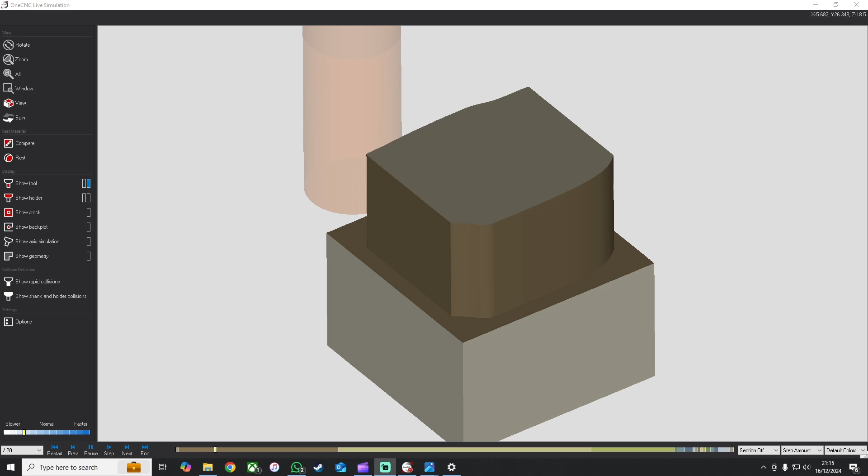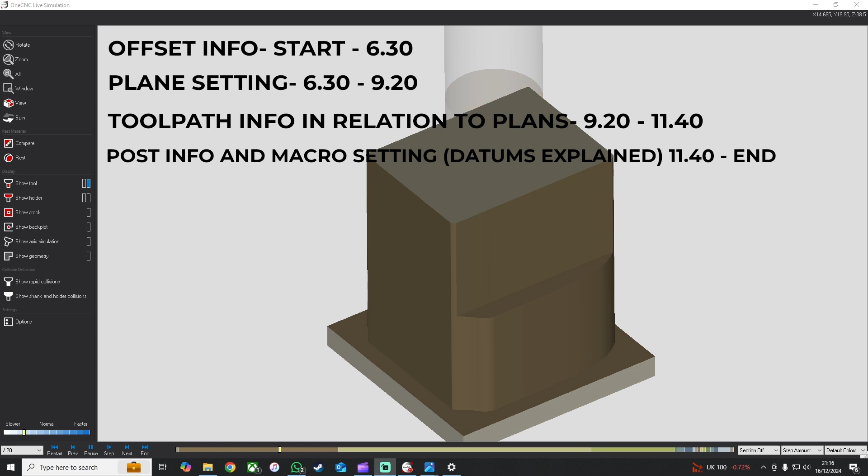So at the beginning of this, we're going to be talking about offset, all the offset details, and then we're going to be talking about plane setting, and then we're going to be talking about the toolpath info regarding how you set up your tool into your planes, and everything else regarding that. And then the rest of the video is going to be about manipulating your post, setting your post up, how you write macros, what all the macros mean, where the data comes from, etc.

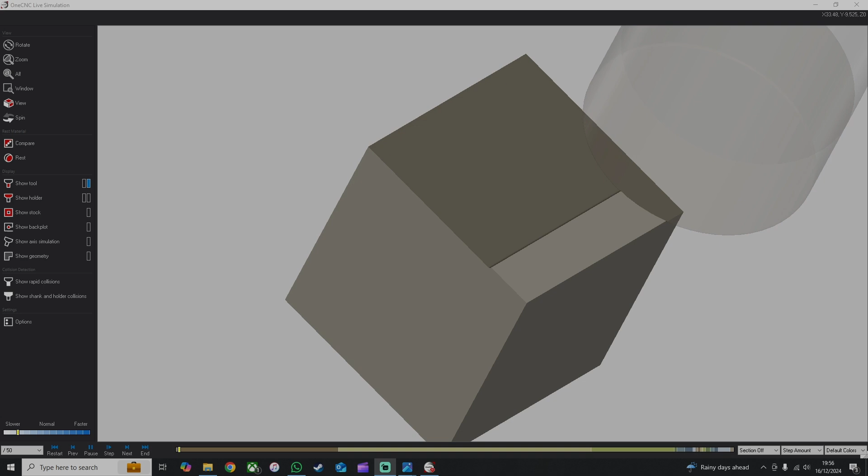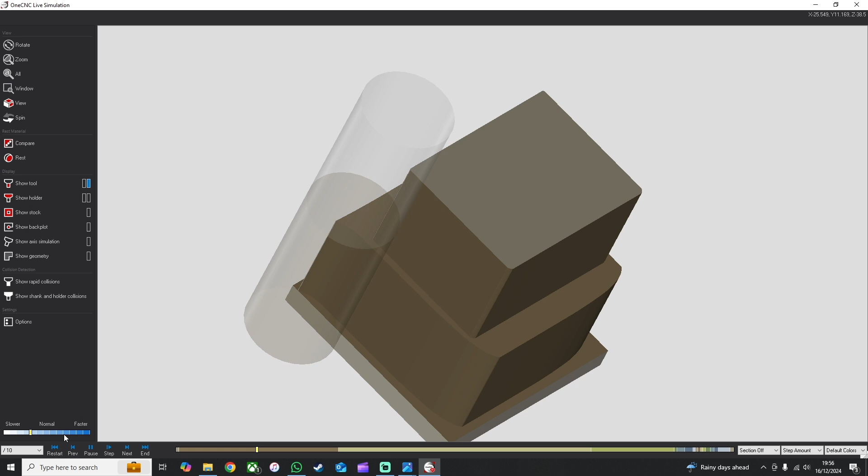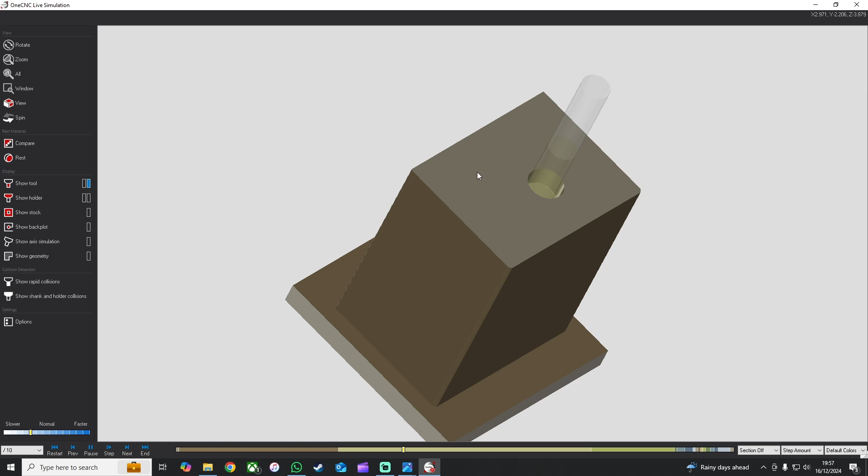But what I'm trying to do is try and give some good advice on how to use OneCNC to get it to do whatever you want it to do. If you're struggling with certain things, then let me know, and I'll create a video on how you can either do things the way I do them, or teach you the ways you can manipulate them to suit your needs. I don't claim to know everything there is about OneCNC. I've just used it for a long time, and I like it. I think it's a good bit of software.

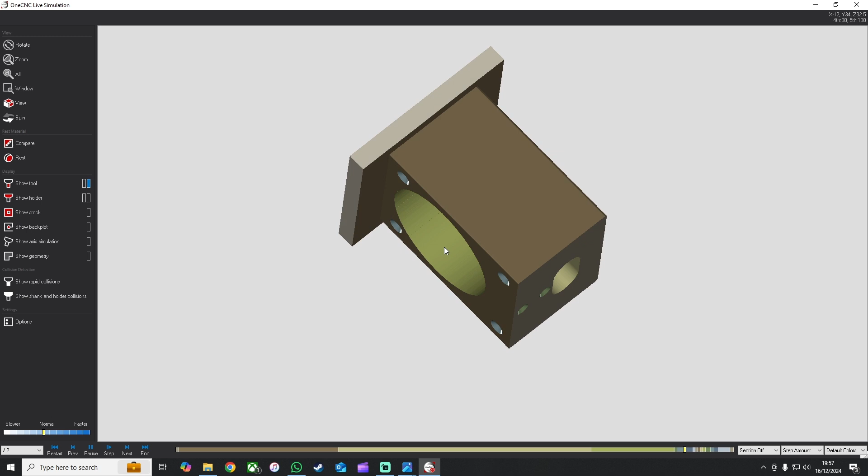I mean, for 5-axis and stuff, don't get me wrong, there's better bits of software out there, like your Fusion and your Hypermill, your Mastercams. There's loads, but if you purchase this and you've got 5-axis machines, and you don't want to pay for another seat on another CAD package, then you can use it for doing some 5-axis machines. I wouldn't ever do full 5-axis style with it. I think OneCNC tip of the day will show you some full 5-axis toolpaths.

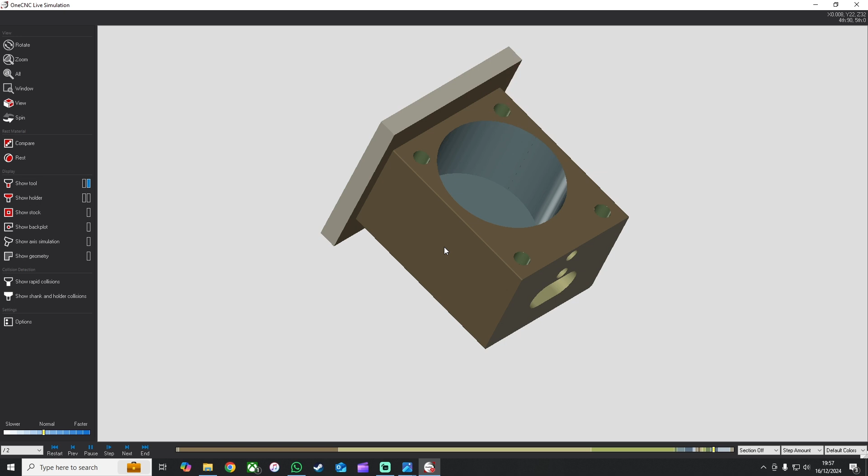I'm not going to go showing you that, because that's not what I've used, and I didn't really get on with the 5-axis side of things on OneCNC, just being honest. 3-axis, brilliant. I'd say it's one of the best 3-axis softwares you'll get, just because of the logic and the toolpaths that are in this software. I think they're very, very powerful.

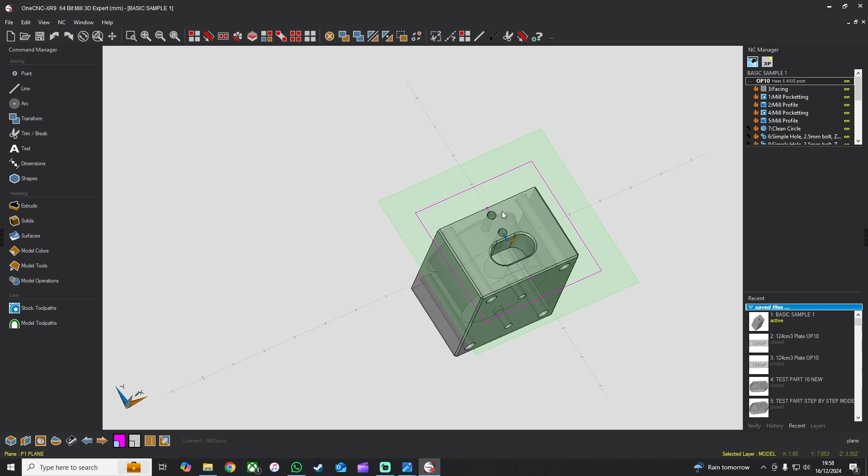Underrated, in all fairness. People go Fusion, Mastercam, Hypermill, whatever, especially Hypermill. I hear that all the time. And they are fantastic, don't get me wrong. I've used Fusion and Hypermill, but I've also used this, and this is the one I'm super confident on. I like this, I keep going back to it. I just like the toolpaths. So without spending too much time waffling on, let's just show you what I'm going on about.

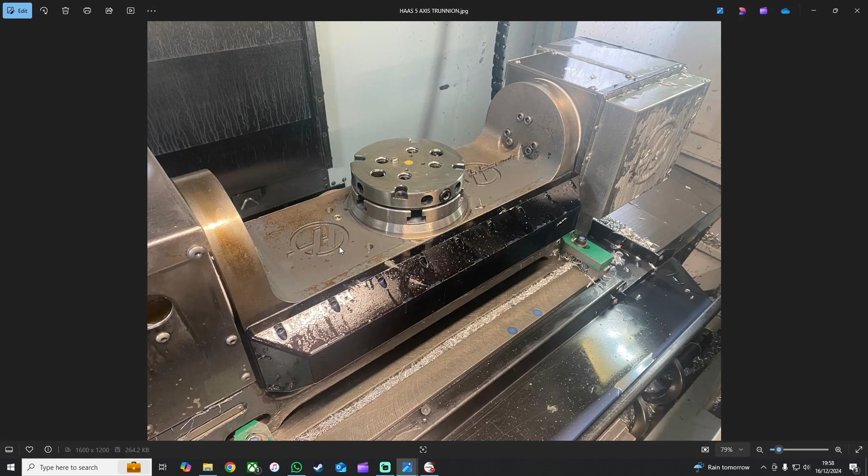So this is your 5-axis Haas trunnion that some of you might be familiar with. You can buy these for about 30 grand brand new, I think. Don't quote me on it, it's not like I've purchased it. But this bolts directly onto the bed of a VF2, as you can see. You could bolt these onto whatever you want, as long as they've got 4th and 5-axis capability around the back.

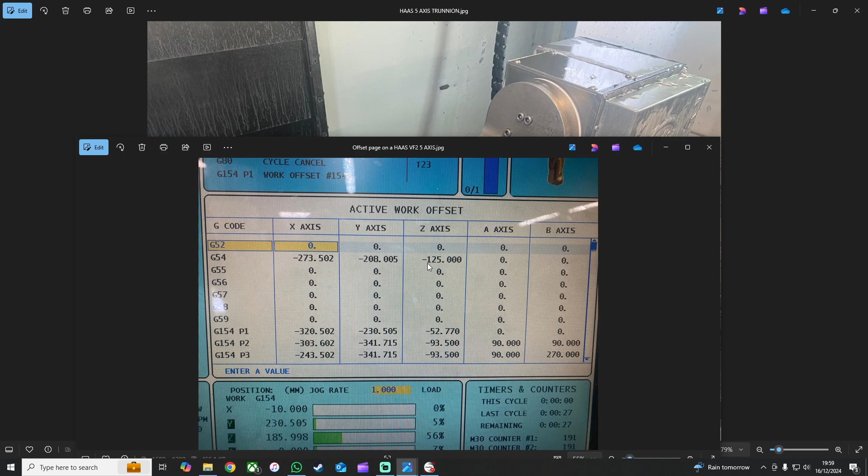So to talk on this a little bit more, I'll just get rid of that photo and I'll show you the offset page, what the offset page looks like when I'm going to show you how to set this up on OneCNC. The center of this trunnion, this orangey point here, will be the center of, well, it's not technically the center of rotation, but that's the center of the platter. This is your platter here. These are where your Lang vices and stuff bolt. I just need to add this in.

I'm going to pause the video and add this bit in, because I forgot to mention it in this video, so I'm going to mention it now. All the tools on this machine are set at 125mm above the center of rotation. That's where that Z figure comes from, okay?

All the tools are set off a post that you can't see in this photo, to the left hand side of that trunnion, which is actually 115mm, but then there's a 10mm setting block that gets used, so it's 125mm from the center of rotation. So that Z-axis shift is to bring all of them tools to be basically set from the same 0 point of rotation, if that makes sense.

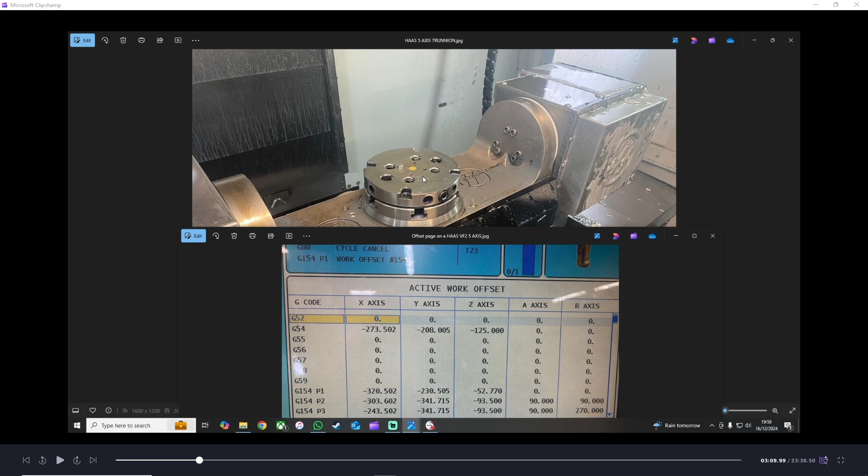Whatever work holding you're using will bolt to here. And then if you look over here, imagine there's a little center point there, and this rotates around that point. You'd think it would be flush with this face here, or even flush with this face where this platter bolts to. It isn't quite. I can't quite remember, it's been a long time since I've actually clocked one of these in. I think it's about 5mm higher than that face there.

It's irrelevant. You just need to find the center of your rotation, and that is where you'll set all your tools from. That's where your datums come from. So on this particular machine, we set our tools 125mm higher than our center of rotation, hence why we have this figure in here. And don't worry, it's not like your Z0s are going to be down here, and if you make a mistake you're going to plunge into it. I'll show you what you do. You use macros to offset this datum to give you these datums down here.

So you've got your G154 P1, 2, 3, 4, 5, right up to whatever your machine's capable of. I think some of the classic controls go up to 200, and the latest gen controls, I think they go up to thousands or something like that. Don't quote me on it. It's not like I'm going to study the offset page. I just know how to get by with it.

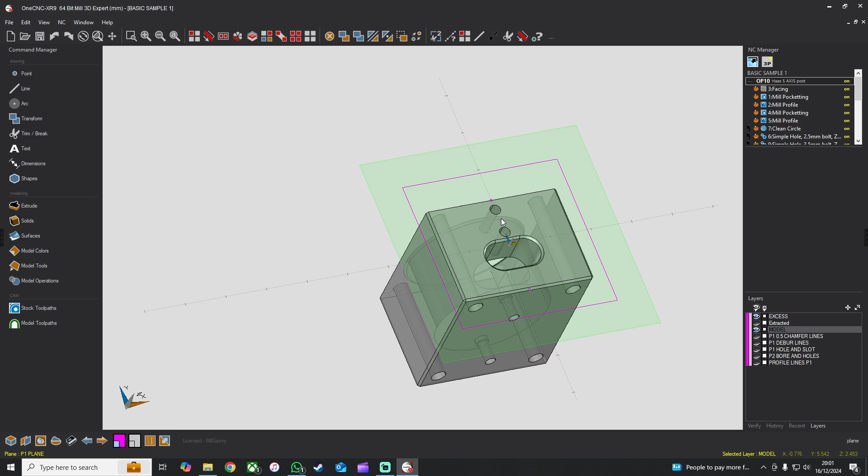So anyway, let's jump into this. When you've got your model like this, when I first set it up, I'm going to orientate it as if I'm looking at it from the spindle's point of view. So you can imagine this part here is in a vise. I've just shut that image down. Let me just reopen that image of the trunnion. Right, my part's in a vise here. Part's sitting about here, and I'm looking from the spindle down on top of it, and that's the view I'm going to see from the spindle. So that would be what I call P1.

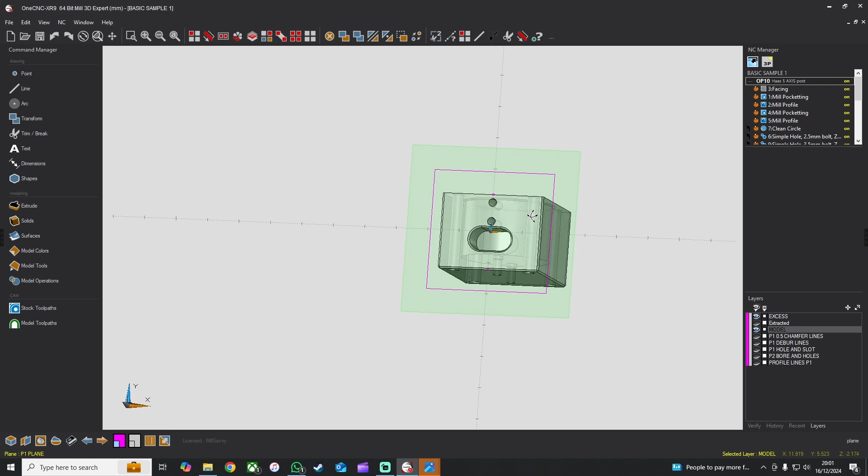And now if I want to rotate it, which I'll show you how to do with the macros when I post this program, I would call that face P2 because it's at the back, and directly opposite, I'd call that P3. I'd call the face to the left of my P1, P4, and the opposite one I'd call P5. You call them whatever you bloody want, it doesn't matter. But you just need to know how you work and work the same every time.

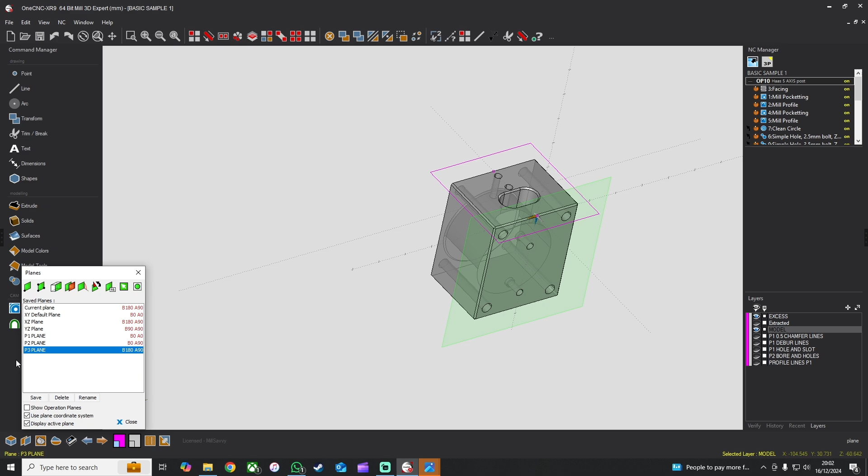So to set these planes up, you can see here I've labelled them like this, and you can see the plane changing, look. And it's very important that you have these highlighted when you're applying your toolpath. So there's my P1, there's my P2. To set this P2 up, I'll just redo it to show you. Before I jump in, I create points at where I want to datum that plane from my P1 top face. Once you've got your point where you want it, it's very easy, because what I do is I extract the profile lines and then put a point in the center of it.

So it's quite simple. Don't try and do anything complicated, there's no point. Create a plane from the surface, select that, move your plane to a point, select that point. You can see how my plane is not orientated how I want it. A lot of the time, all you've got to do in this situation is rotate it around the Z-axis tilt by 180. And you can see there, that's set up how I want it to be set up.

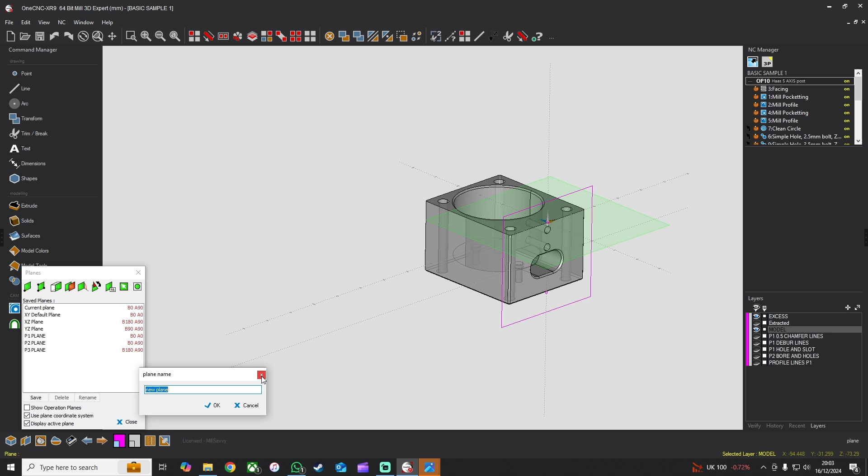Now before I do anything else, you want to click save. I've already created a plane, P2 plane, so I'm not going to click save. But if you're doing this, save it, name it what you want. If you click save, look, it comes up and gives you a choice. Name it P2 plane, G154 P2, whatever, up to you. Call it Steve if you want.

Anyway, you can see there, my x-axis goes sort of to the right, y-axis is going towards the back, and the z-axis is going up. That's how you want it to be set up. That's how your P1 and everything else is going to be set up. So you want all these planes to be set up with the right orientation.

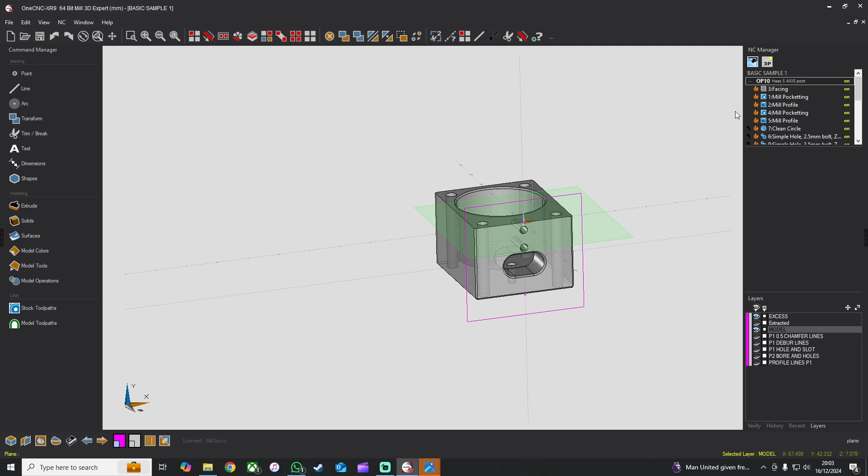So now you know how to set up your planes, and obviously you know how to apply a toolpath to a part as you're working your way around it. So watch this, I'll flick through it so I can show you what I mean. Let's just grab my P1 plane. For instance, that's P1, P1, P1, and as it's going on, I'm doing everything I can, and then you can see that it jumps to P2, but you can also see this plane moves.

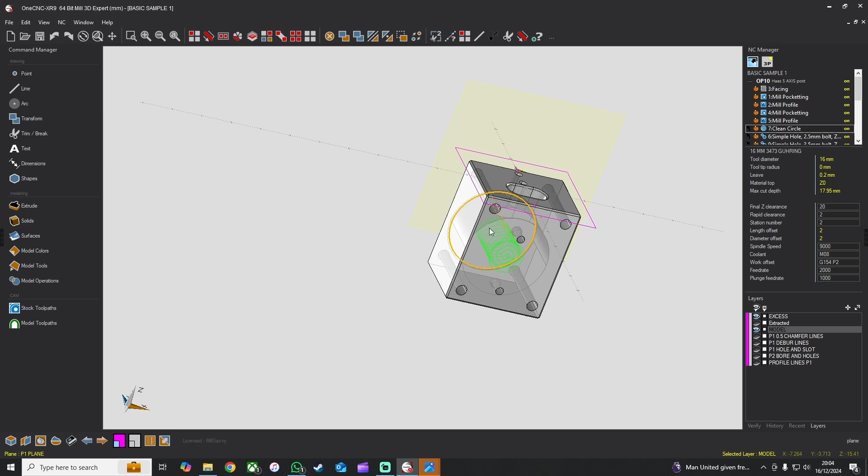That's because when I'm applying this toolpath, I'm making sure that I've got this selected. So every time I apply a toolpath, I select that plane. It's a little bit more work compared to what you'd have on something like Fusion, but remember, I'm using 3-axis reposition. This isn't full 5-axis software at this point, if you know what I mean.

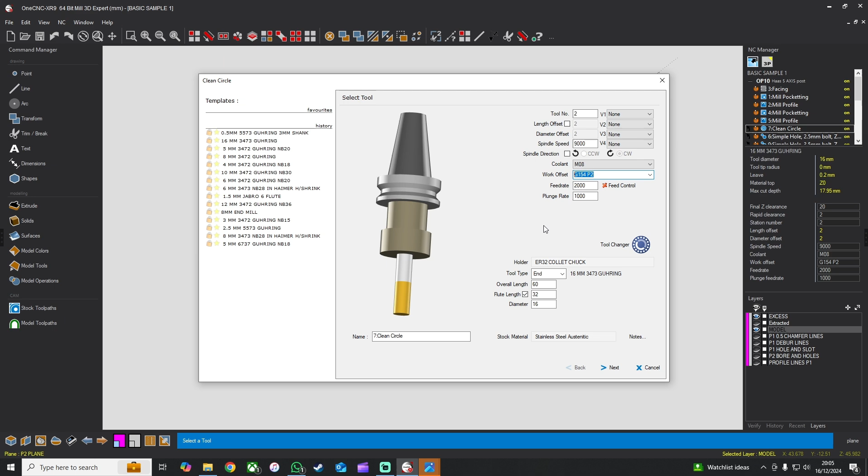So if I just go edit to show you how I'm doing it, that's how I would program with my work offset. If I'm using P2, I'm going to program it with P2. It's very easy to get this wrong, because this will default to whatever you used on whatever toolpath you're selecting. So if I'm using profile, the last time I used profile, it might have G54 in there. I don't want it to be G54, I want it to be my 5-axis macro datum, which is G154 P2. So I need to remember to add that in. You can get this very wrong, so you need to be careful.

I'm not going to try and say this is it, I'm showing you how you can manipulate it to do 5-axis on a 3-axis reposition option here. So don't get me wrong, there might be better ways of doing it, but this is how I figured out how to get it to work for me.

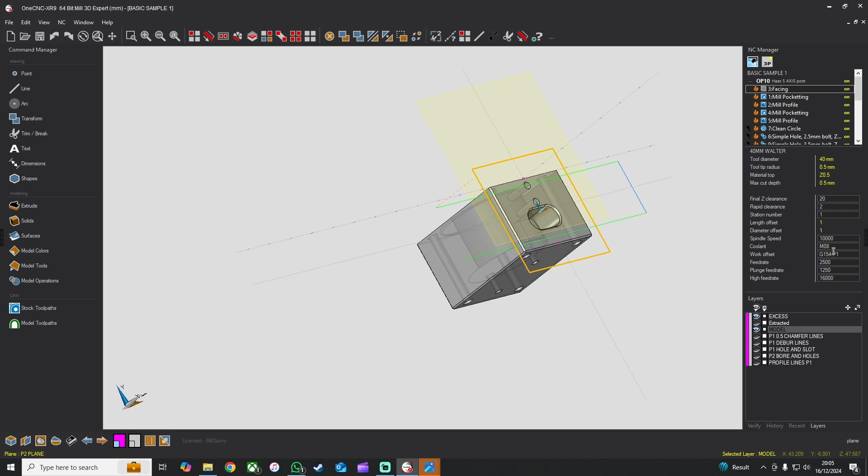So once I've done all this, I'm not going to post it anytime soon. I'm going to do a lot of manual checking here. As I'm going down my toolpath, I click on these and I check here, don't want to alter it, I check here, yeah, that's P1, that's P1, P1, and I work my way all the way down this list, checking everything I've clicked and typed is correct.

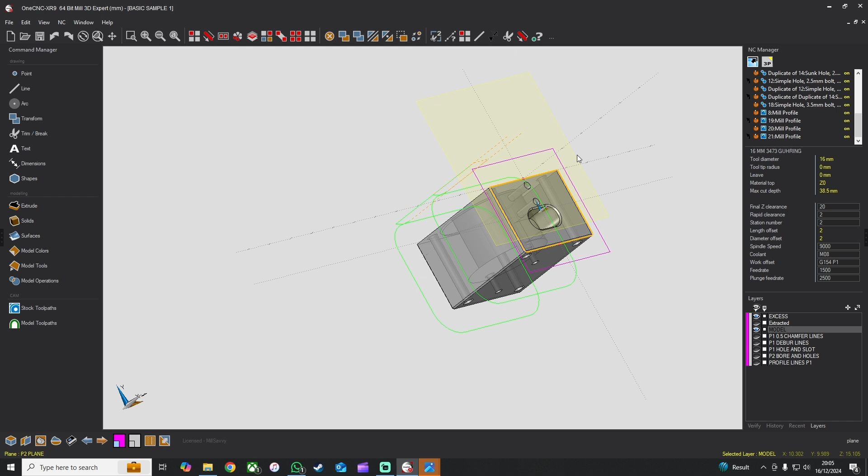The last thing I want to do is post a 5-axis program out wrong. It rotates to the wrong face with the wrong macro settings, and I put a tool through the job, or the vice, or smash the machine, or damage something. That's the last thing you want to go doing.

So I'll show you what the post looks like. This is my sample 5-axis post. I haven't quite perfected this post for this video. I need to go do it, but it's close enough for me to show you an example.

Just quickly save over this. You can obviously see that I did a video and then thought, nah, that's a bit rubbish, I'll redo this quickly. I think I can do it in less than 15 minutes. So

So I don't want to focus too much on what's going on at the top here. I'll be repeating myself from the previous videos. The only thing I will mention is, look, it says warning, duplicate tool stations, duplicate station used, yeah? And all that is where I've used the same tool to chamfer and spot. That's all it is. And I've just had them set up as two different things in my library, because this one, I've cheated it to think it's a 3mm tool, look, 1mm offset. I'll literally, before I post it, I'll just delete it.

Right, so this is the bit that will take a bit of time to explain. This is your macro. This takes all its information from, let me show you. Hold on, not that. Let me pull up the image. It takes all its information from these lines here, G54, X, Y, and Z, A, and B. Okay, so let me pull up the picture of the trunnion again.

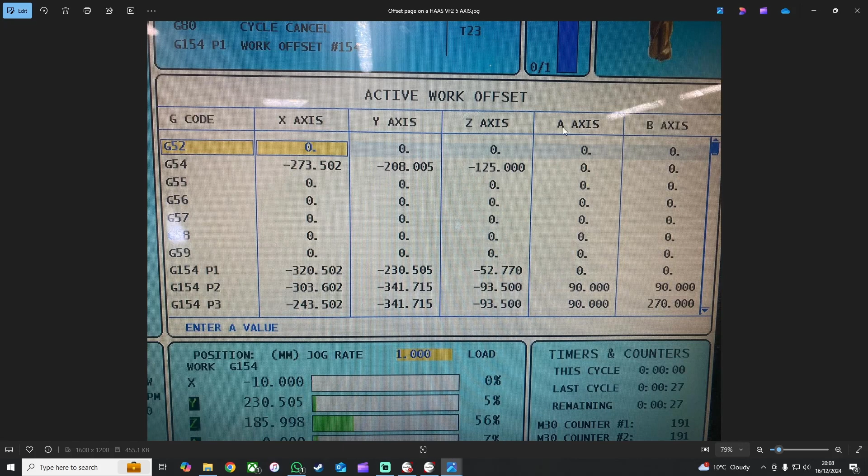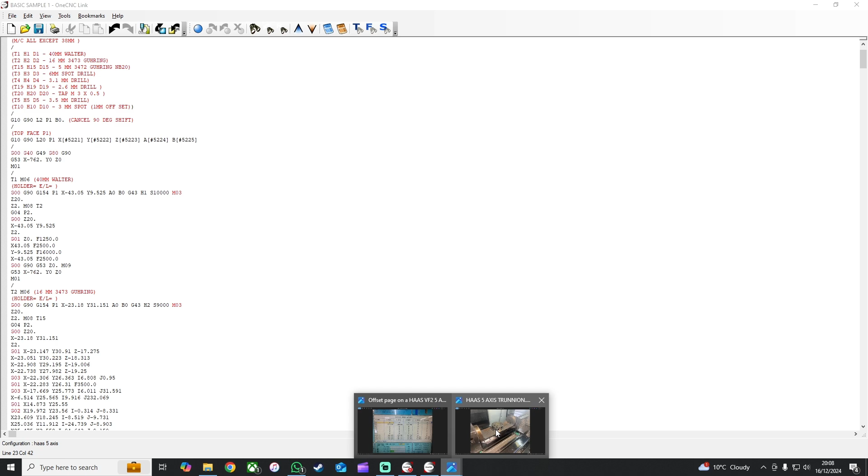So my P1, for instance, let me pull that back up, will be 150mm higher than this point here. So don't try and worry too much about what this number is. It's kind of irrelevant once it's set, because you just set everything from the center of rotation, and that's all you really need to know. All I need to do is, if I pull up that picture one more time, I should have explained it just then. My job, say this here is 25mm above center of rotation, because center of rotation is down here somewhere. Say that face is 25mm plus, right?

Then I've got my vice, then I've got my job, right? And then I need to allow for a skim, so I'll come down a little bit to allow like a 1mm skim on that billet. See, that distance from there with the skim down to the center of rotation is, just for this example, say it's 130mm. All I've got to do, I'd work it out obviously, go space, plus, space, 130, dot, space. Yes, you do need these spaces, right? It's a bit silly, but you do. So that would be my Z set.

If I don't put anything in the X and Y, they default to the center of rotation, which most of the time will be perfect, because everything you program a lot of the time comes from center. If you want to offset it, if you want to program something from the corner, say your job's 50mm square, and you wanted to do it from the left hand corner, you go minus 25, like that, and you could go there if you want to go from the back of it, plus 25. It's that simple, and then you program from that point.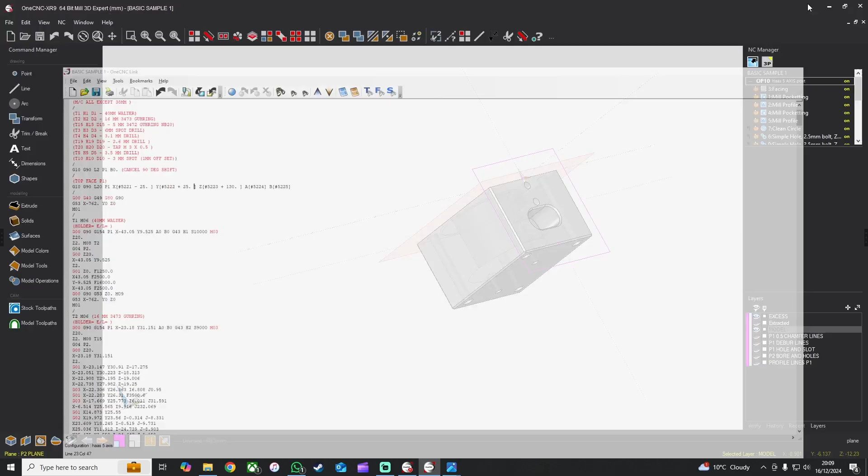But if you program from that point, remember on your OneCNC, let me just shut that. So for instance, if I was on P1, and just humour this is say 50mm by 50mm now, that would be this corner here, because you remember you're going minus, plus, that's there. You can see, look, your X and Y are orientated like that, that'd be that corner. So let's bring that back up. You can see how I've set my plane up, it's centre, so I need to leave that as its default positions.

So to explain this as quick as I can, X, see it's hashtag 5221, that refers, pull up my data, this again, let me minimise it so you can see a little bit more.

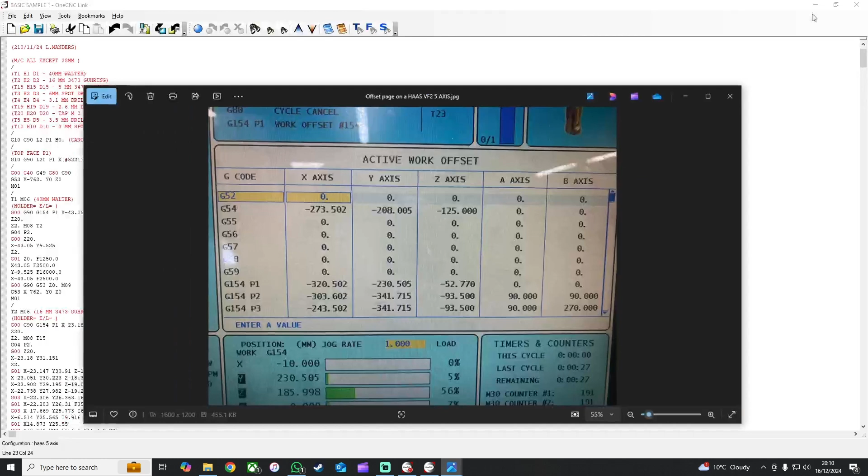That refers to this line here. So that's basically saying, whatever the figure in there is, take that and put that there. Right? Obviously this is not a photo of this macro, so these numbers are not going to match up, just to point that out. But if I run that macro, that number would be the same as that number. Why? #5222 is this line here, so it's saying take that number and put that there.

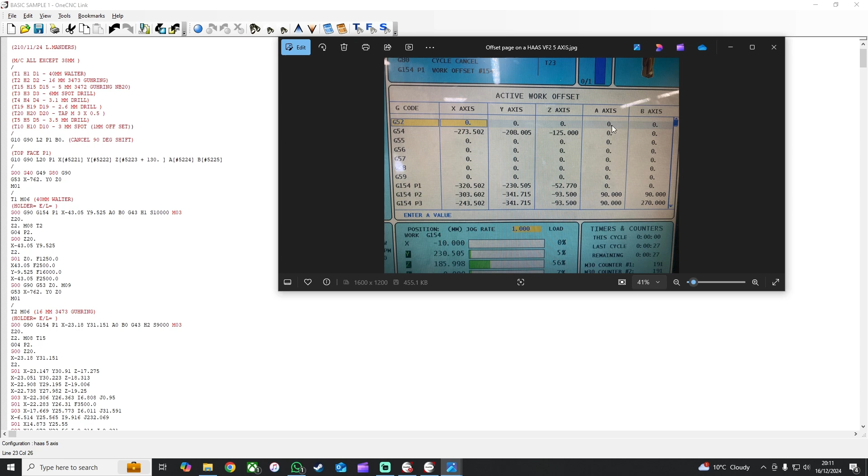If these haven't got anything in them, it will just take whatever's in this box and put it down there. Whatever macro I did read had the same idea. And then you set these as your datums. This line here is a macro line, but this is a G10, a glorified G10. You've got your G10 saying take from somewhere or apply an offset somewhere, and then an absolute command, which you could probably delete to be honest. And then your L20 and your P1 refers to a G154. And then these are where you're pulling your data from.

So to set up your P2 and 3, so yeah, I have killed 5 minutes already, I just had a look at the stream.

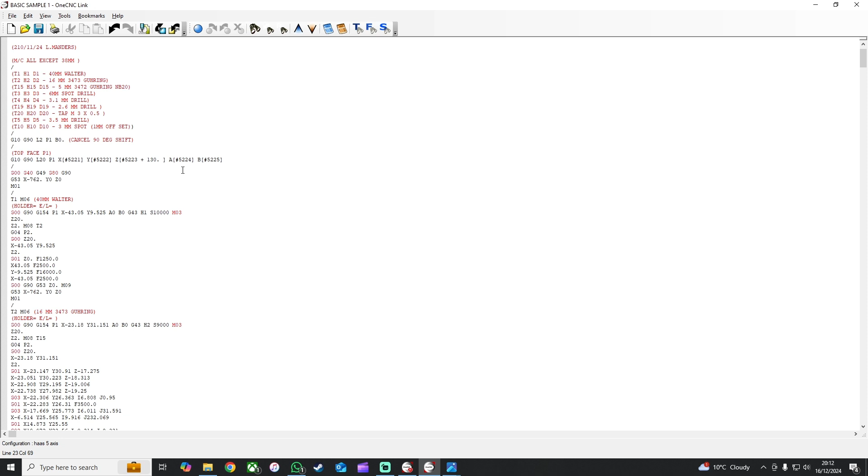All I would do is I'd copy this. I wouldn't do that, hold on. And I'd paste it, and then I'd alter it for my P2. So over there I'd go P2, and I'd say back face, and I'd call that P2, and then they're the same, other than this now turns into minus 130 because your Z becomes your Y when you rotate it 90 degrees. I click plus 90, B's not changed, right? And that's how I want it to be.

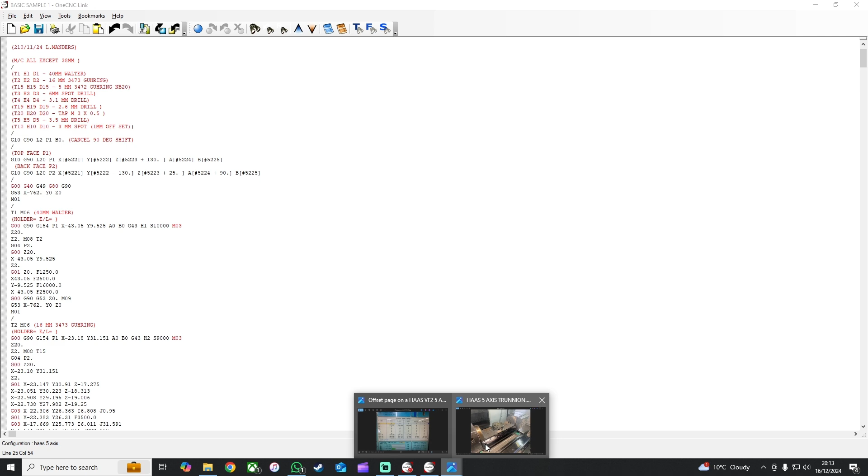Remember, if it was 50mm square, that would be plus 25, because you're coming from the centre of rotation. So now if your trunnion rotates 90 degrees down, you're coming up from the centre of the trunnion, which if the part's only 50mm square, is only going to be 25mm. I can't show you a picture of that because I don't have one. But that would be down here somewhere, in line with the centre, and then plus your 25mm up, and that's the top of your job.

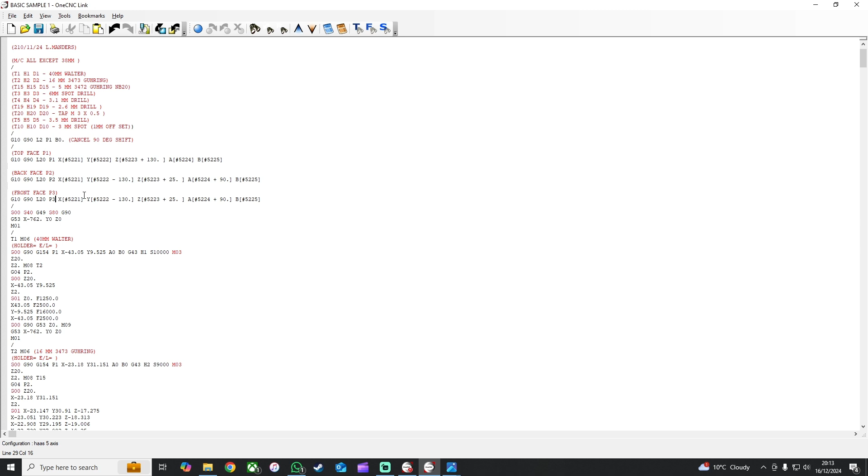P3, let me just space that out, put that back. Because P3 is similar to P2, and the only difference is that my B axis has rotated, I'll go P3, I'll call that front face, call that P3. Remember, if you're not coming from your datum point, then these things might be different. But I'm coming from centre, so this is how this works here. And then all I've got to do here is go plus 180. So that would be my macros basically set.

If what I told you was true, for instance, the job is 50mm square, it's 130 from centre of rotation to the top to allow for a little skim. So they're your macros. This is how I've cheated my post. I've gone G154, I've typed these bits in manually in my post, and I'll flick to that in a second, and I'll put the A and B in there as well, and then you've got these Zs and everything else coming down, and then you've got your safety lines here to lift up to tool changing height before it moves away.

And then all this basically programs the machine to, hold on, wrong photo. When it tool changes, this whole lot will move into this corner over here, and the tool changer is up here, so it just gives it a bit more clearance. When it's tool changing, you can set a safe tool position about 2 or 3 different ways on a Haas machine.

The way this machine was set up is we programmed it with a -762 because that's the max X position, but also when it read an M6 code, it knew to move to that position. I think I've got a note in one of my engineering Bibles basically how to do it. I can't remember how you do it off the top of my head. I ain't done it for years, but I could do it if I had to. So

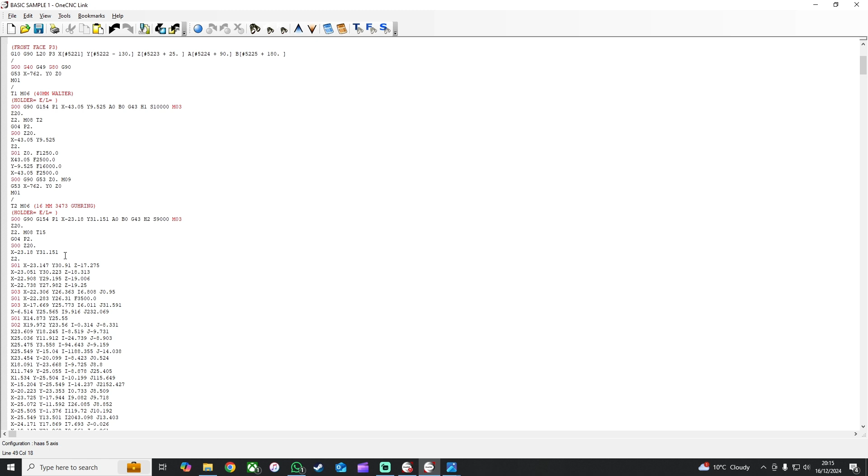there's not much you change from a standard Haas post to get it to work with 5-axis. So let's shut that down. I'll save it. I'm not going to post this and machine this part. It's just obviously for a sort of example.

So tool format. You can see here how I've changed it slightly from a standard. Obviously I've added like a holder and exposed length, because on 5-axis that's very, very critical information. For instance, I might be using a Schunk hydraulic holder or like a Haimer heat shrink, or whatever it is. You need to tell the guy you're posting this out what you're using, and what you're sticking out. For instance, you're sticking out 30, then put 30 in there. The guy don't know.

Right, OneCNC posts. Let's show you what I mean. Job sheet, and it tells you what tools you're getting and everything else. Let's see what I get here. Look, bear with me. You get this information, but they don't tell you stick out, and it doesn't tell you what holder you're using. This is quite basic, isn't it? As you flick down here, it gives you a bit more information.

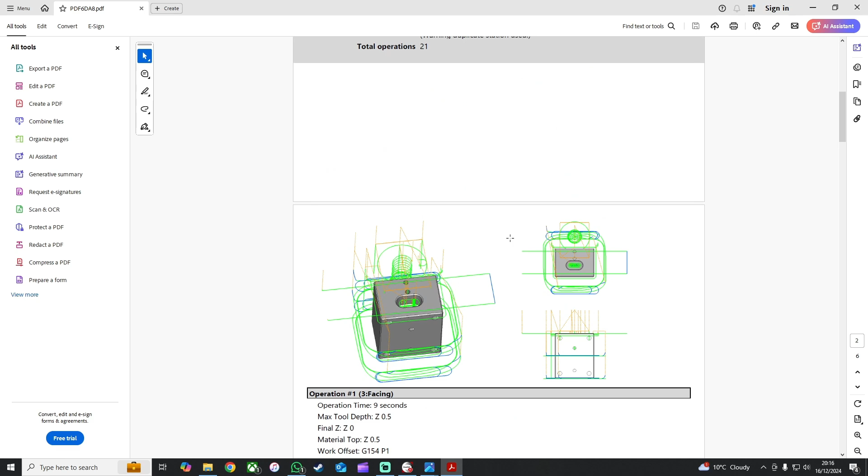But anyway, you need to tell people what you're doing. You're running the graphics, you're seeing everything, you've got all the information here. You need to type that in a program and give it to the guys and girls on the shop floor, so they know exactly what's safe, and then that way you've got the best chance of getting it right first time.

The only things I think have changed, obviously my A and a B, my work offset that's still standard, because obviously I actually type it in how I want it to be. Next tools there, G4 P2, obviously I've added that, and then we start finishing. I've added a macro there for me to fill out manually. Unfortunately, OneCNC will not populate this for you.

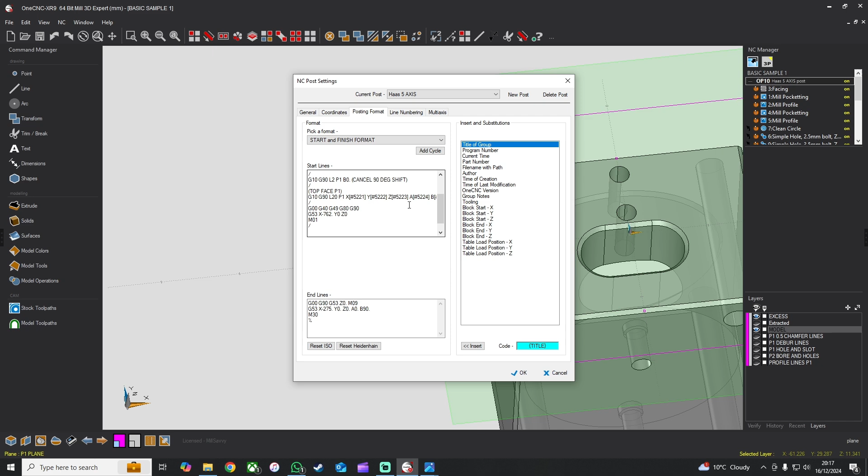Don't get me wrong, if a OneCNC expert watches this, they might know a way of getting this to populate for you, or they might say you've got no chance when you use 3-axis reposition. You need to be using the 5-axis. Stock tool paths and 5-axis up here. But me personally, I didn't want to pay for this. This can do what I want, and even when I did use this, I didn't see many benefits to it. But then I didn't pay for many tool paths either.

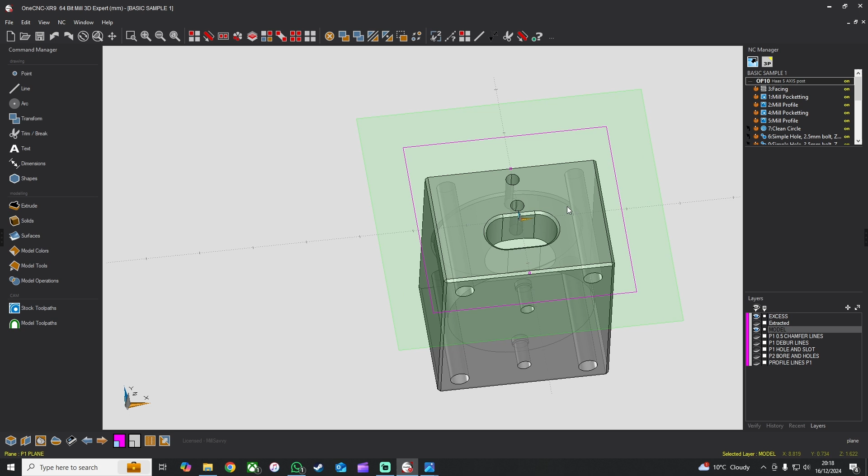So it's up to you at the end of the day. If you've got full access to it and you want to go down the path of figuring it out, then fair play to you, but I couldn't find much out. I couldn't find much on the internet around these 5-axis paths. Nothing that made me want to use it.

I really like the 3-axis side of OneCNC. I think it's super powerful, very easy, quite user friendly. There's a lot of ways you can manipulate it to do things that other CAD softwares can't. So I'm a bit of a fanboy when it comes to that sort of thing, but that's why I bought it. Don't think there's much else to say about 5-axis.

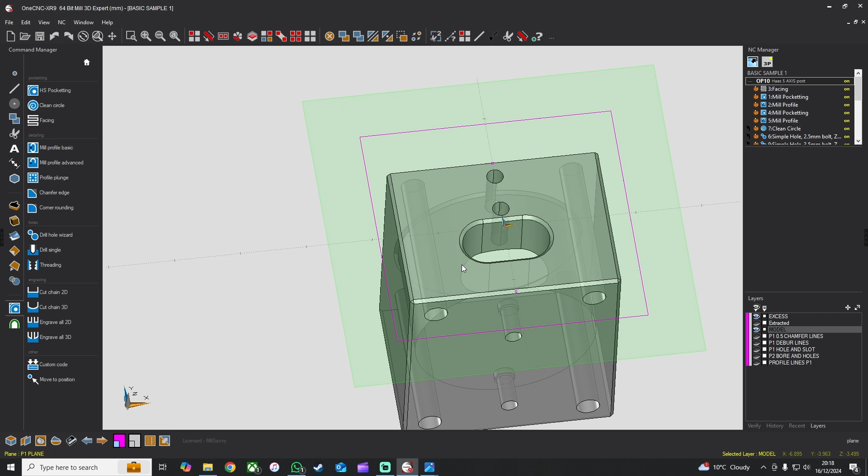Don't get me wrong, parts vary massively. I can't show you too many. Obviously, there's a lot of NDAs and stuff like that. This is something I've designed. I can show you this, but obviously my customer parts I can't show you. I'd have to redraw a version of it or something like that, and I could show you in a video like that.